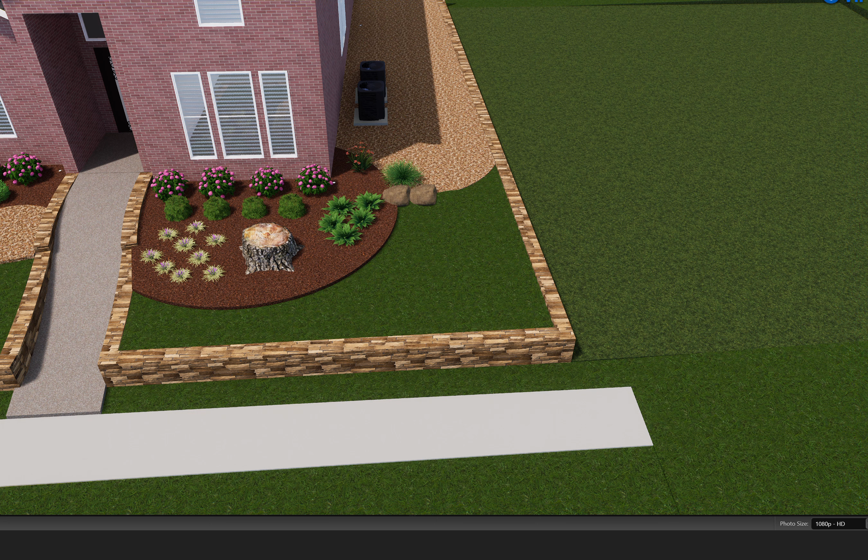All right, so I'm going to start on the right side of the house. Right side of the house is simple gravel. This anti-erosion gravel. We'll put a geotextile down, which is a fancy word for landscape fabric, and the gravel on top. That should take care of most of your erosion problems over here. You will just have to make sure a couple times a year you de-weed it and clean it.

We'll capture gutters like I talked about when I was on site, and all the gutters will be captured, all the water will be captured, and all that water will be run through the wall, so all your roof water runoff would be captured. Then we dig out behind the wall here, mainly in the front. Find the weep holes in the wall, add gravel to those weep holes just to make sure water flows through, so there's no drama with water flowing through the wall.

As I talked about, the nemesis of any retaining wall is pressure building up behind the wall from too much water collecting behind the wall. So we just got to make sure we have a path of least resistance for water to pass through the wall as effectively as possible. And I'm referring to any water that natively lands on your yard, i.e. sprinkler system water and or rainwater. In my plan, all the roof water will be captured.

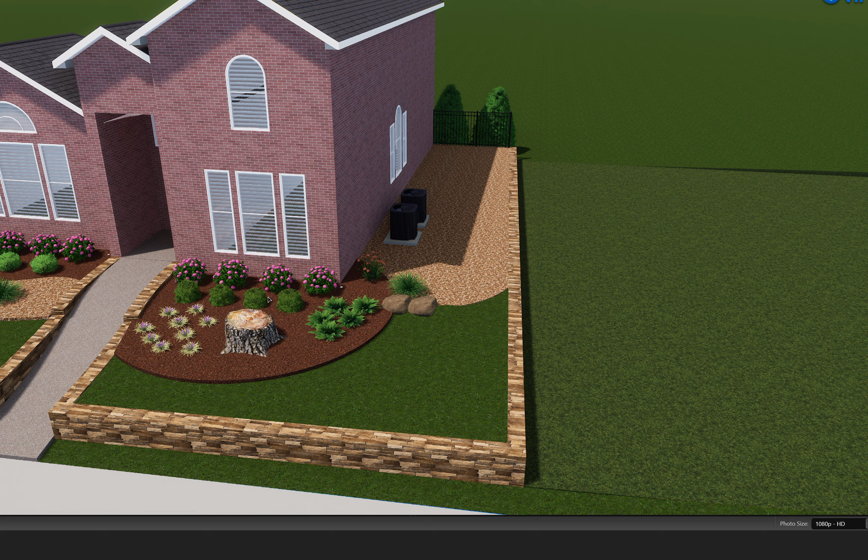Okay, so plant perspective on the side of the house here, we have a Turk's cap right here. That's a Turk's cap. Giant liriope. These are wood ferns. In the back, we have endless summer hydrangeas. They'll come pink, but we can put some augmentation in the soil that will cause them to turn a bluish color. Mine are blooming right now, and they're absolutely gorgeous. The beautiful thing about the endless summer is you'll get a couple blooms throughout the summer season.

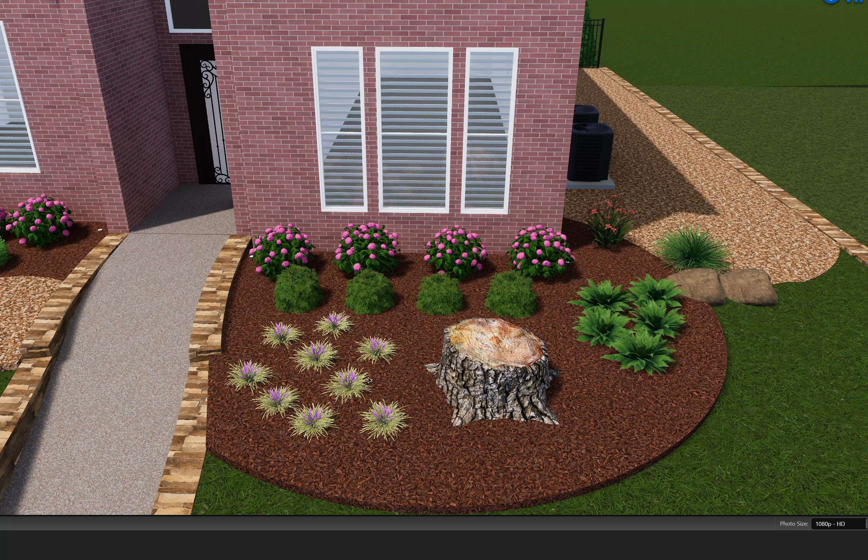Then in front here, because of how shallow the tree roots are, I did nandinas. Then here I did a ground cover called a variegated liriope that serves two purposes. One, it brings color to this space. As you can see, lots of green here, and this is a two-tone color. The second is it'll do a better job in this location of holding the dirt in place to mitigate erosion.

The exact location of the steel edge border is TBD. The steel edge will come a rust or a steel color that'll rust a nice natural patina color, and it fades into the landscape. Then from a grass perspective, Zoysia Palisades will be the grass I recommend. We could do St. Augustine if you like, your choice, but I recommend Zoysia Palisades. A couple boulders here. Boulders go where the steel edge meets. It's not a very clean intersection, so we use a boulder to clean up the intersection.

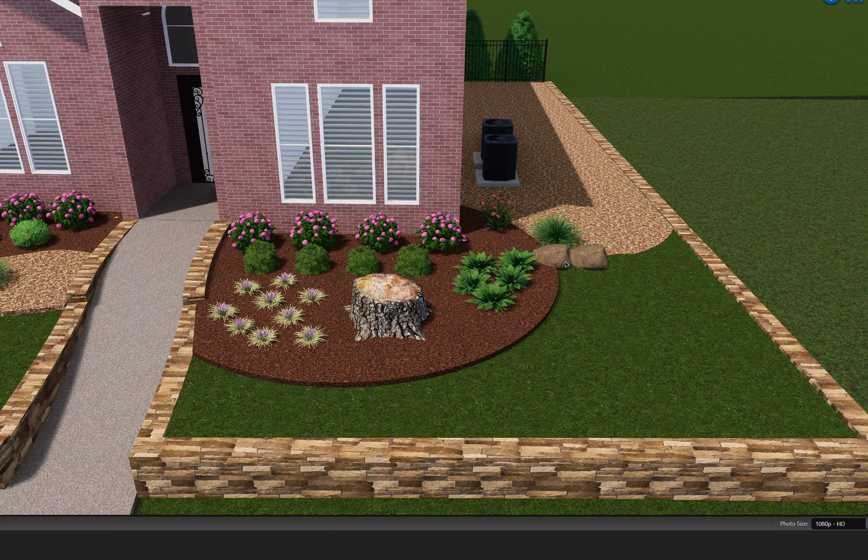On this side over here, because of the way your yard is laid out and how crazy the root structure of this tree is, we're doing gravel across here to kind of fill in where those roots are. The exact location of this gravel is to be determined based on how the root structure is laid out, but this is pretty close. We'll run a border over here. The border will terminate somewhere into a tree root, then everything will fill in with gravel. We can run a piece of steel edge through here and terminate it up the house.

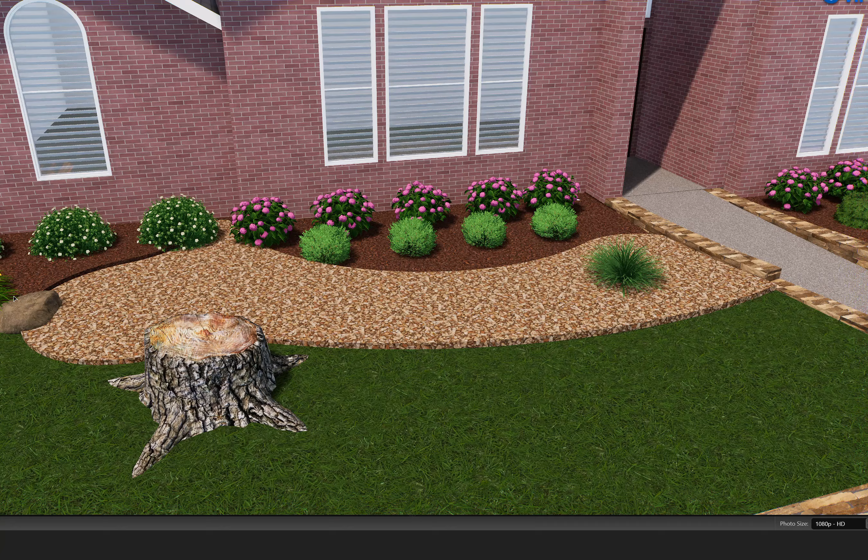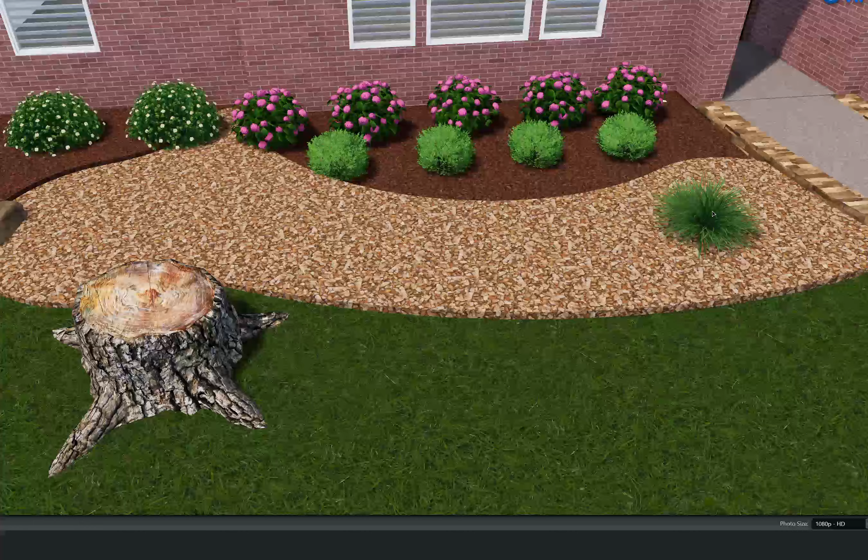Come back around here and use the boulder as our junction point to hold where everything kind of meets. Then over here on the left side, of course, plants. So Endless Summer hydrangea. Again, this is a dwarf yaupon holly. This front plant here is a giant liriope, just so something that pops, the green in the gravel.

Then here's a bridal wreath spirea. It's a really pretty plant that blooms a white bloom in spring. Pop of color here. I needed something that also has a shallow root structure due to the roots in this area, so I did daylilies, one of my favorites.

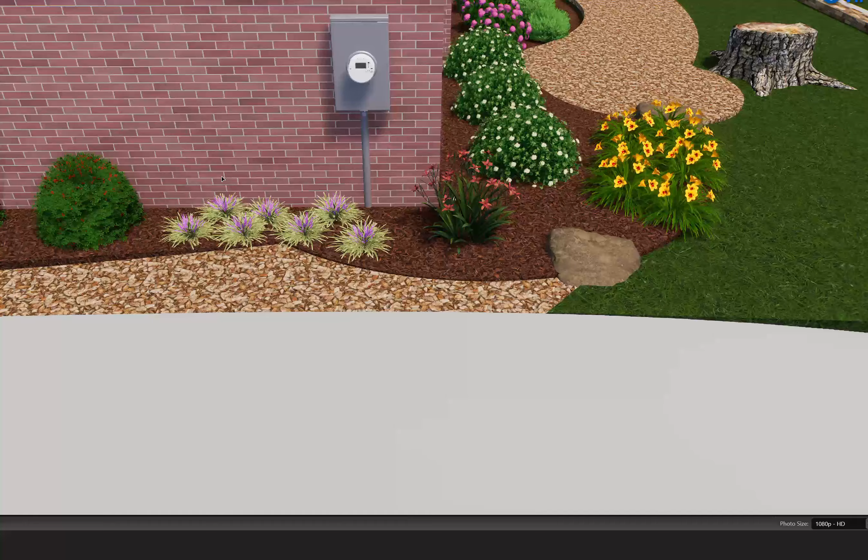Side of the house here is, what's this called? Turk's cap. These are variegated liriope again. You have to have a 3-foot clearance in front of the meter to meet code, so I just did this as a filler. How this is going to lay out is to be determined. I don't think this is exactly right, but we just make that small adjustment on site.

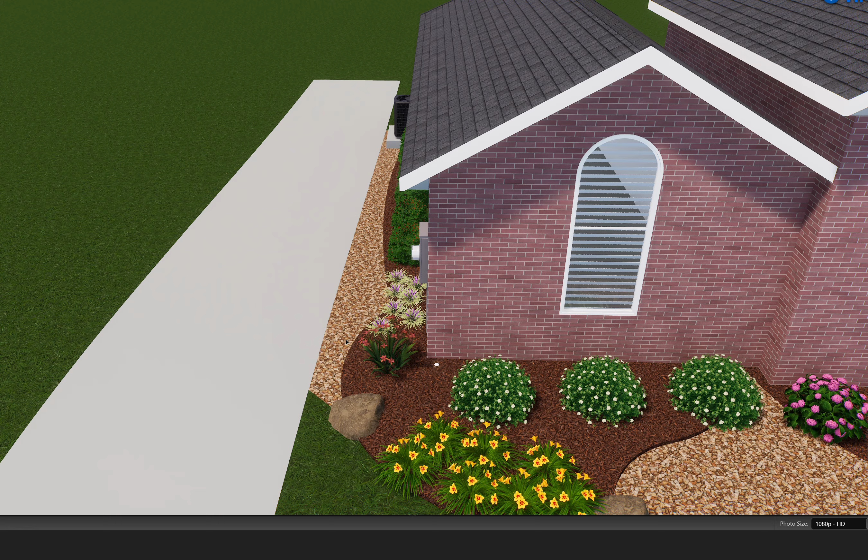We can have mulch go up to the driveway if you want, or we can do gravel along the driveway just in case you accidentally miss and you end up driving there. It's your choice. We could do a steel edge here to separate the two, and we can have the concrete as your natural border.

Some of these, like this extra steel edge here, it really just depends on how much you want to spend and how fancy you want with the borders and how much maintenance free you want and what look you're going for. Some people do the steel edge here, some people don't. We can give examples of either way. Okay.

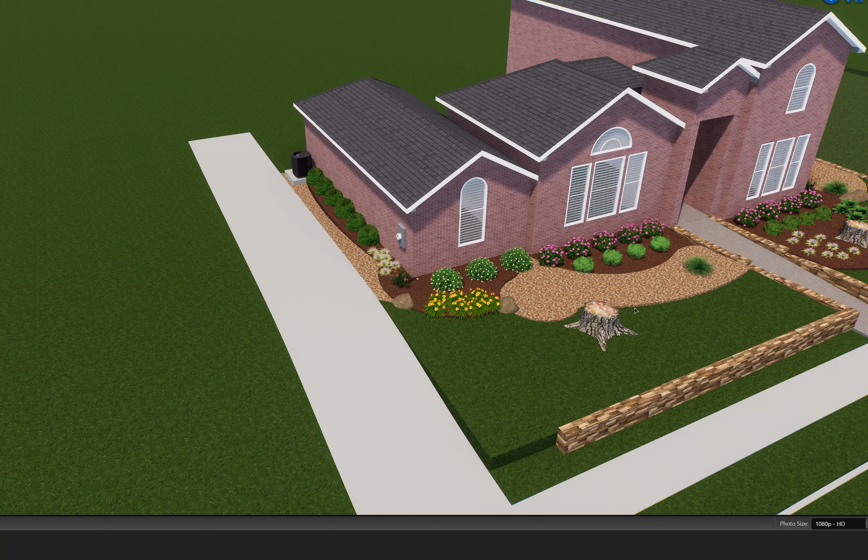This side of the house, again, drainage is going to be the most important thing. So we're going to capture most of the drainage and we're going to send it this way and send it down. Same thing with the retaining wall. I recommend we dig out where the weep holes are. We'll add that gravel behind there where the weep holes are, just to help that water find that path of least resistance into the gravel, into the weep hole. So any native water or sprinkler water that lands in the grass area has a path off or through the wall if it does not run over the wall.

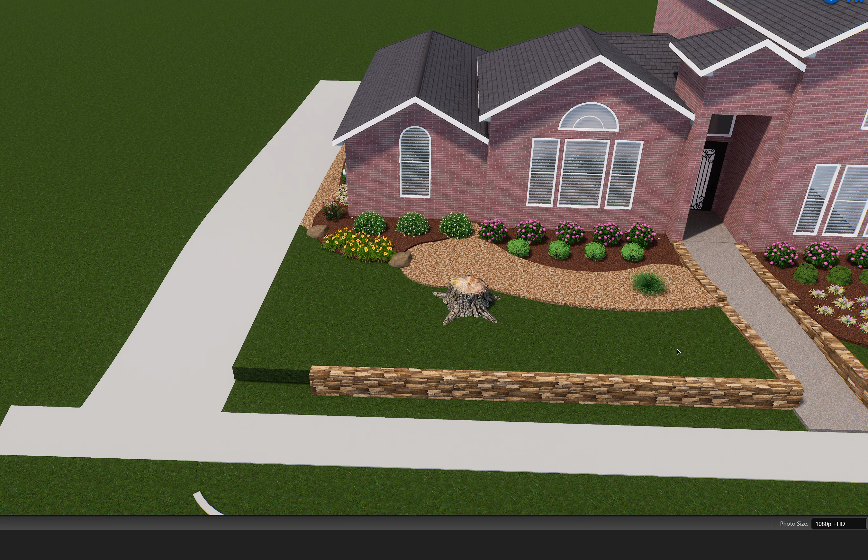All right, so here, whatever grass we do up here, we'd match down here. Same thing, whatever grass we do up here, match down here. And along the street, same thing. All the grass matches. Zoysia is, again, the most shade tolerant flavor, or St. Augustine if you want to save a few dollars.

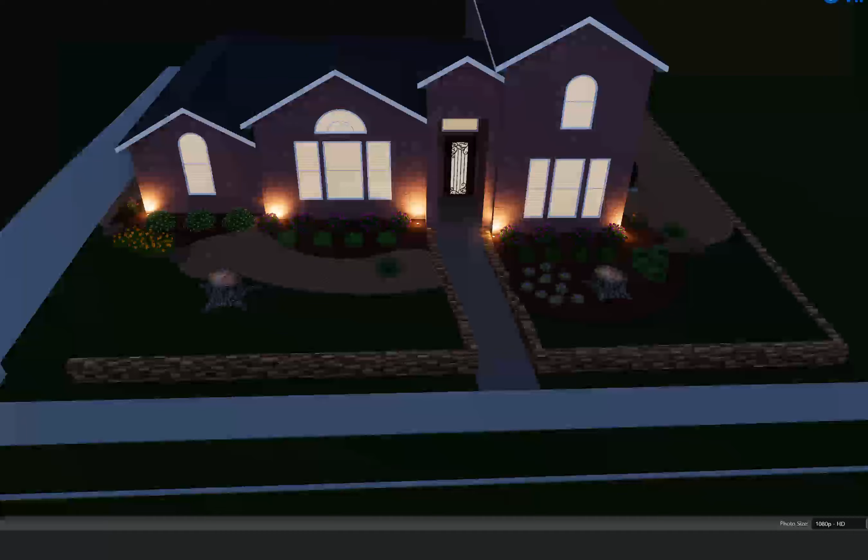Last bit of it, of course, is lighting. Okay, so there's lights. Lights go a long way. Our lights are RGBW, which is a fancy term for color changing lights. You take a remote, you walk up to the light, you hit a button, it changes color. So you could do red, leave this in white, then go blue.

If you're a, I don't know, Dallas Stars fan, you can do green, white, etc. Your choice. Like we do a lot for religious institutions where they do a color. So I think my church, they do red, white, and blue for all the major holidays. It's just an example. Alrighty, I think that's about it for this.

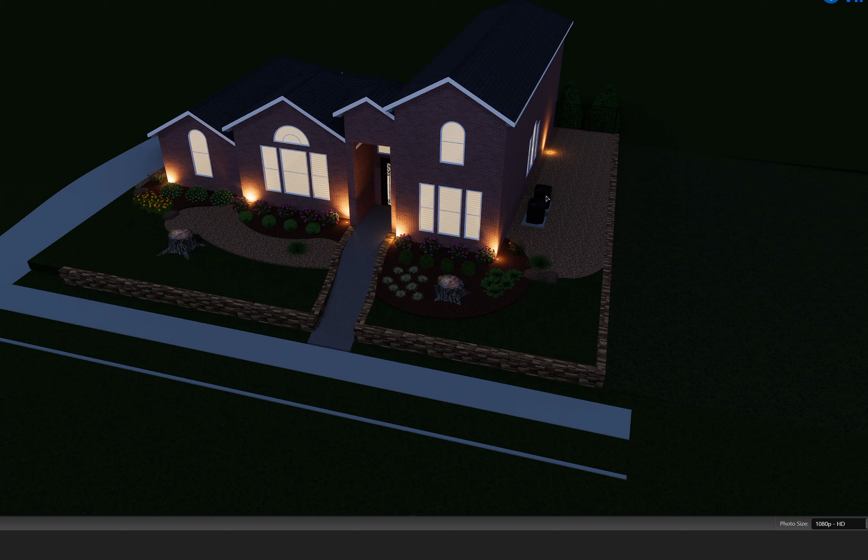Oh, the trees, we're not taking the trees out, of course. I just did not use full-size trees just so you could see the property. So let me pause here. I'm going to send this over to you. I recommend next steps is a Zoom call to walk through any changes, answer any questions you might have. Then we go on to pricing. Or if you love it and got to have it, I can go ahead and price this out as well.